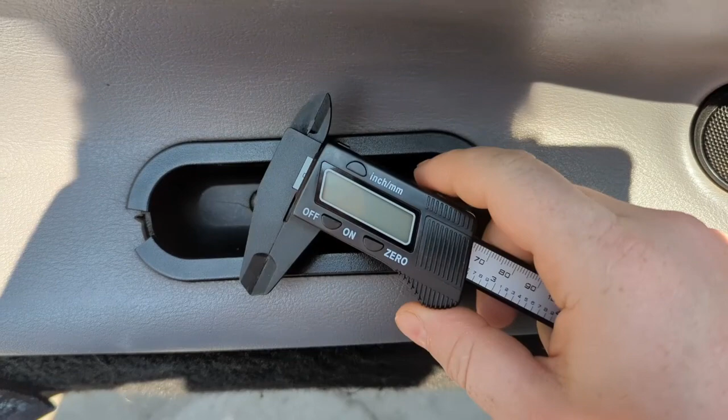These crack and break often. They're like 80 bucks if you can find them. But we're going to 3D print one, and I'm going to show you how to prototype that. And all you're going to need to prototype a part, for this video at least, is a screwdriver and a set of calipers, and then some free software for prototyping. So something like Tinkercad would probably be okay.

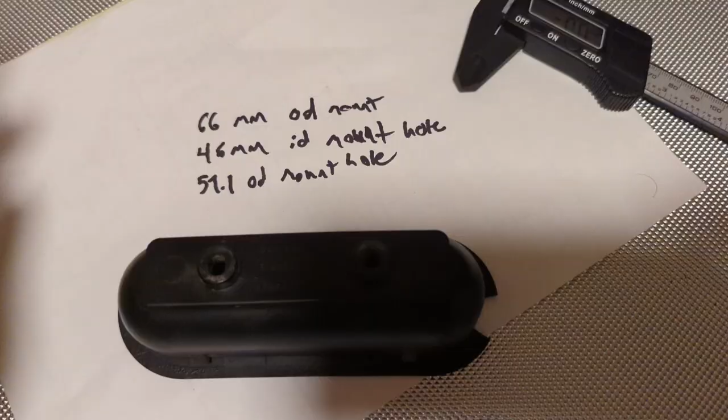All right, so we got the part out of here, and now we need to start taking some measurements. So I'm going to take this back to my office, and I'm going to show you how to use a set of digital calipers and how to reproduce something that you can print with ease. Okay, so I'm going to go ahead and explain to you how to use a set of digital calipers. And now that we have this part out in front of us, we can see what we need to measure.

Now, these are the mount holes that were on the bottom. This actually could be completely flat here. I'm not sure why there was a space, why they used it exactly like this, because when I took this off the car, there was nothing underneath of here that fit this profile. These were just kind of molded that way, and I don't know why. Could have been an afterthought, who knows.

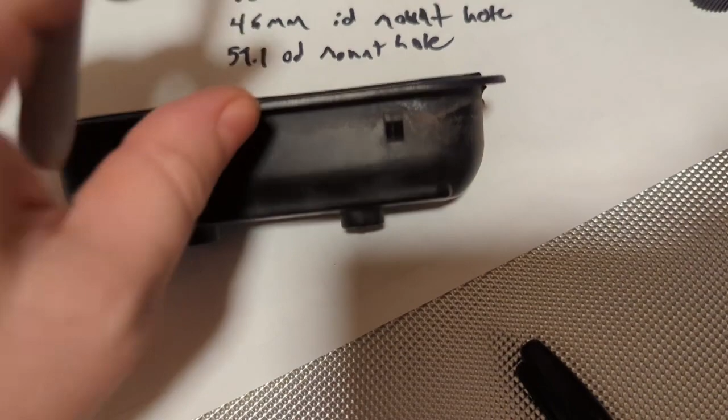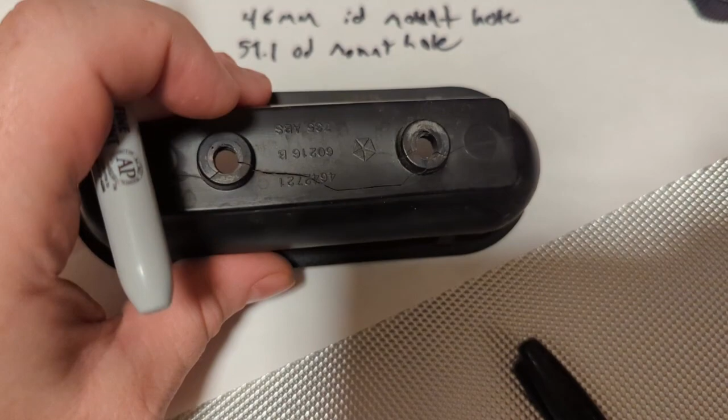Point is, when you're prototyping a part, look out for things like that, things that you could improve on the design. Because if you look in here, you can see that this is cracked underneath from all this pressure on the screws. Where did the cracking start? Where those screws mounted. So these right here, these are pressure points. You know, if you could make this whole bottom thicker, because this can all be flat where it mounts, well, you think that's going to crack? Probably not. At least not nearly as easy. So these are things to look out for when you're prototyping.

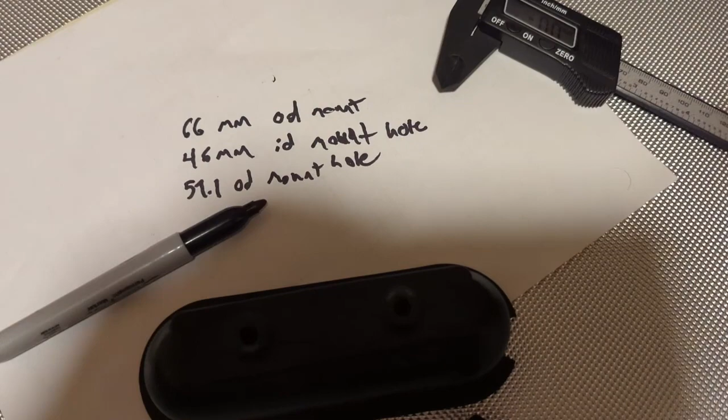But let's go over how to use a set of digital calipers. I measure everything in the metric system. I don't do dishwashers per mile. I'm sorry if that disappoints you. So make sure that when you're using your calipers, I recommend not being on inch, being on millimeter.

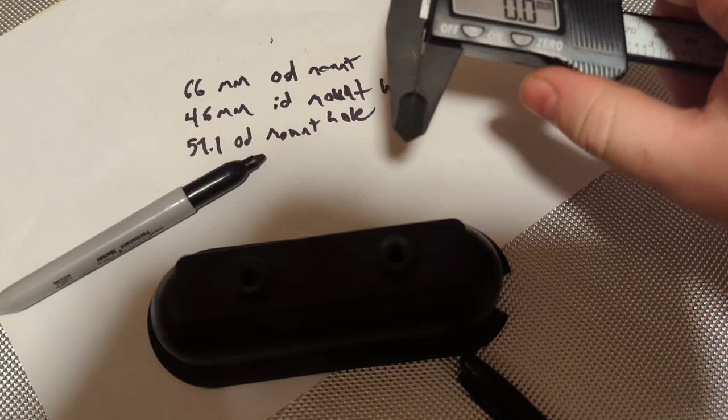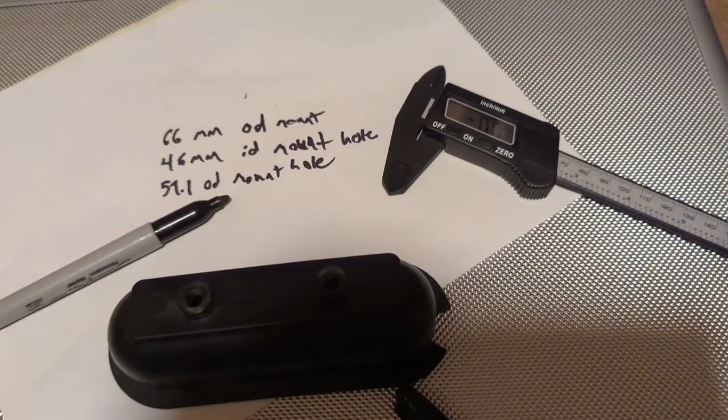If you get serious into prototyping and 3D design, I think you'll find that if you adopt the metric system, you're going to have a hell of a better time. Not to mention collaborating with other people, especially overseas. They're not going to measure in dishwashers per mile. They're going to use the metric system. And I think you'll just overall find it easier.

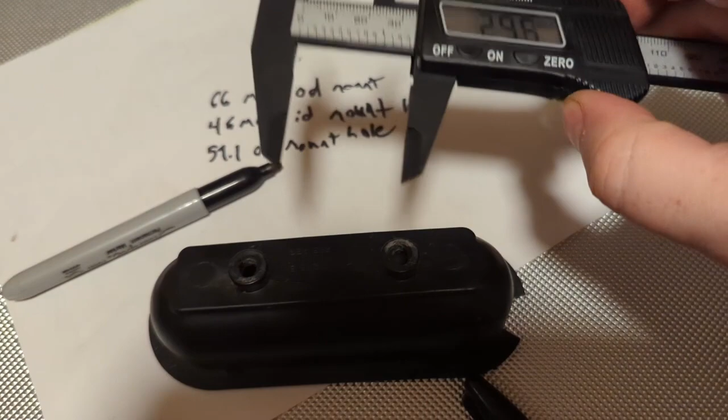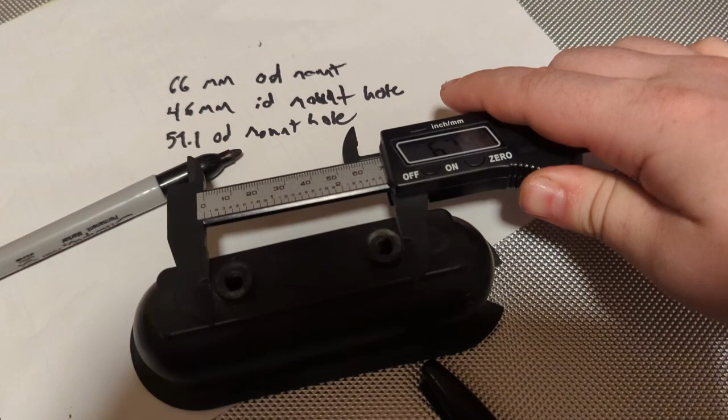So when measuring these points, we're going to start off, and I've already pre-mic'd these up here, but we're going to verify our findings here. And we're going to look and measure the outside of this mounting spot, right? So we're going to use this edge, because this is the edge that's going to pinch this, right? We want to make sure this is as accurate as we can get it. All right, and I gave it a little bit of leniency. So we've got 65.8, but realistically, if I move it up just a little bit, we've got 66. That's a negligible difference. So we're going to just put that down and keep that there.

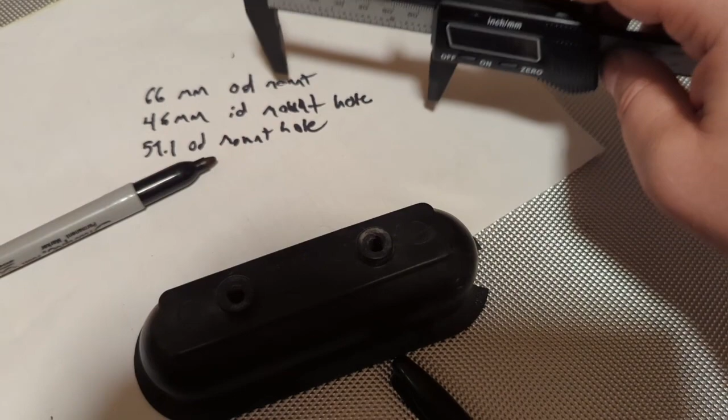And then I've got 46 millimeters inner diameter for the mount hole. Now, this is going to be this to this over here. Now, I can't measure that with this piece up here, because this is for things on the outside. This is for things on the inside. They're both just as accurate. They're just measuring things for a different purpose, right? So that's something to keep in mind. Some people see these on their calipers and they have no idea what these are for. So just to let you know, that's what they're used for.

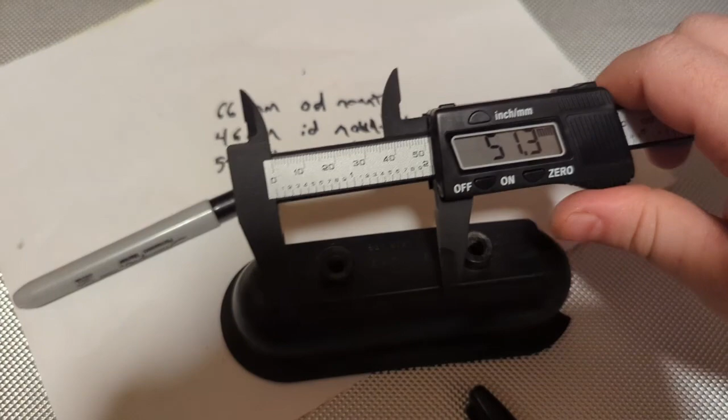So now we're going to measure that. So we're going to go inside to inside here. All right, we got 46.1. I rounded that down to 46 because that's not going to hurt anything, especially since these are screw holes, to be off just a little bit. So I'm kind of rounding these. 51.1 could realistically be 51.

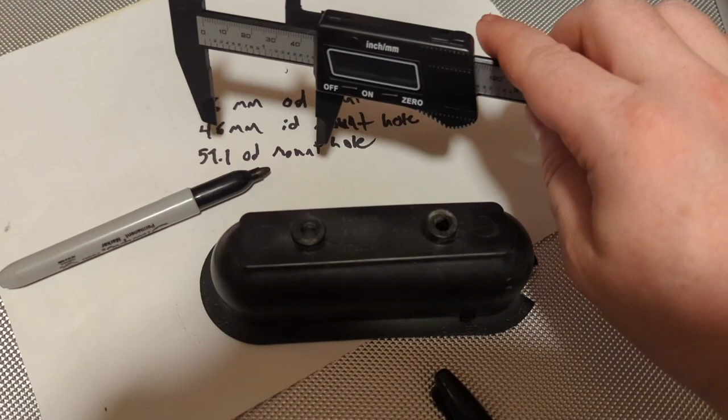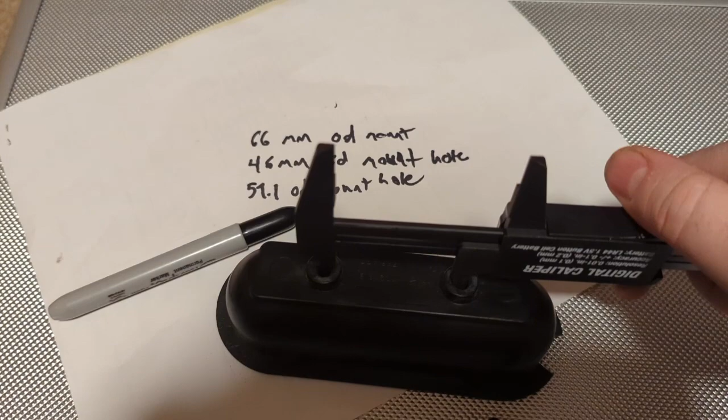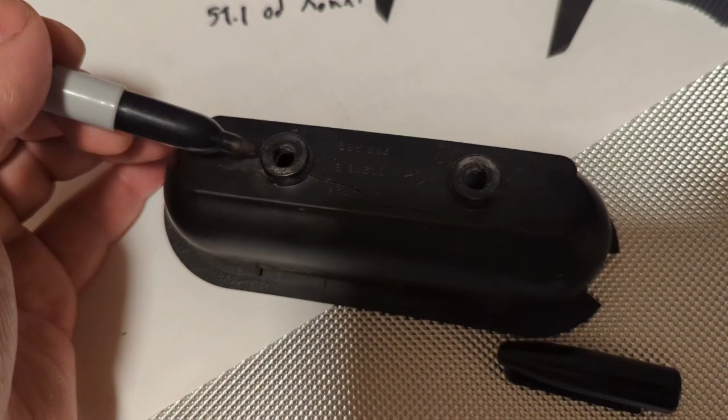When we go to 3D print stuff and design our 3D design, how far this is from here to here, from here to here, and from here to here. That'll let us figure out how big the holes need to be and how far apart they need to be. And then if we get stuck and we find out something didn't fit right, we can go back and double check our measurements. So that's the whole point of miking something like that out.

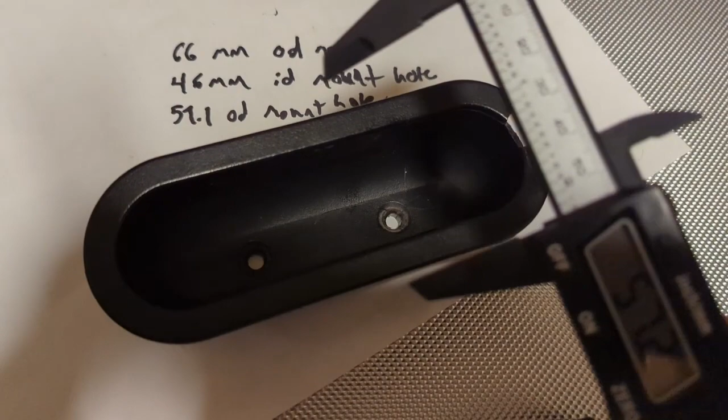Now I'm going to mic the rest of this object out. Things to keep in mind as you're doing this, things that you want to look at, are going to be things like this guy right here. You know, how wide is this, right? So if we come down here and we're measuring the top of this, oops, sorry. Kind of hard to do with it sitting up there on those little thin guys. All right, we've got roughly 53.5 in width, right?

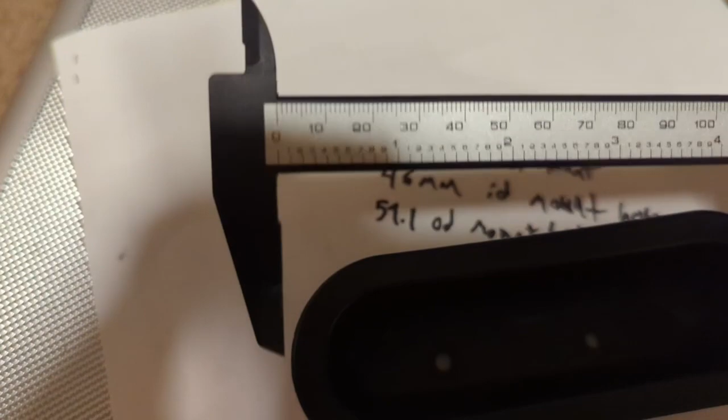And then you need to do the length of the object. And these are just barely going to reach, right? So I'm not going to be able to do that with one hand holding my camera here, but I'll mic that out. But just to give you an idea, you want to make sure that you can get as much of this as possible. Other things that you want to get, thickness of the plastic.

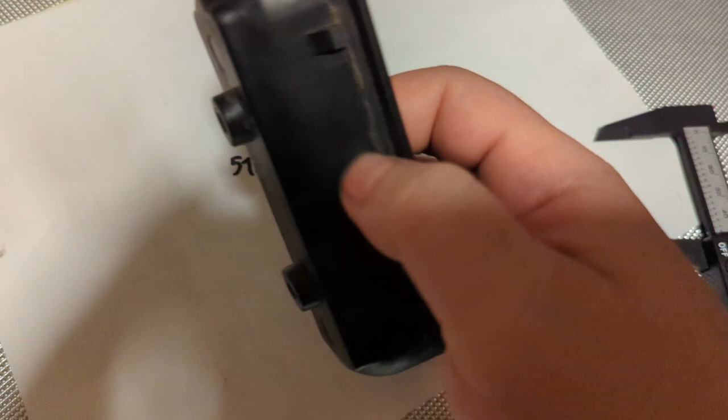Now an easier way and a better way to figure out the thickness is we measure what this bottom thickness is down here, right? So we'd measure this point to this point between my fingers, and then we measure the inner measurement from here to here. From there, we'll be able to construct an object like a square or a rectangle in our 3D program, taking the difference of this out, and what we're left with is the thickness of that wall. That is another way to do that.

A lot of the way that I design things in 3D is actually using subtraction and a lot of addition. Basic math skills. In Rhino, it's called Boolean subtraction. You create two objects. For instance, I have a whole object here. Let's say this was just a square. And then I've got this inner part right here that I've made as a rectangle. And I want to have that rectangle within that square so that it becomes the shape of this handle. I do a little Boolean subtraction. It cuts that out of there, and what I'm left with is the whole part.

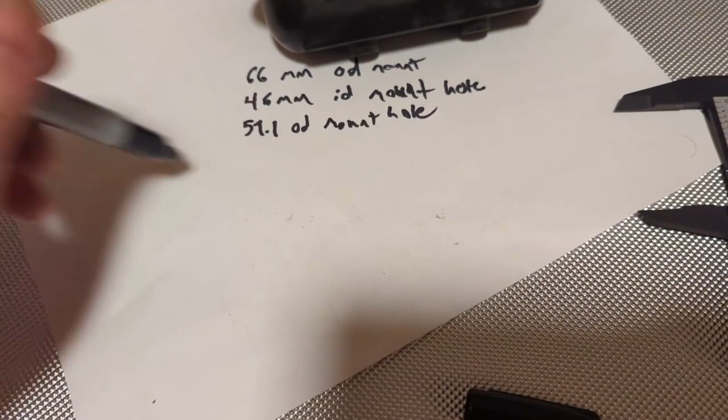So those are a couple of things that I tend to do. Sometimes that's faster and quicker than trying to do very specific, fine measurements. Anyway, let's get this marked out, and then we're going to put on paper all the needed things that we're going to put into our 3D model, and then I'm going to go show you how to do some 3D modeling.

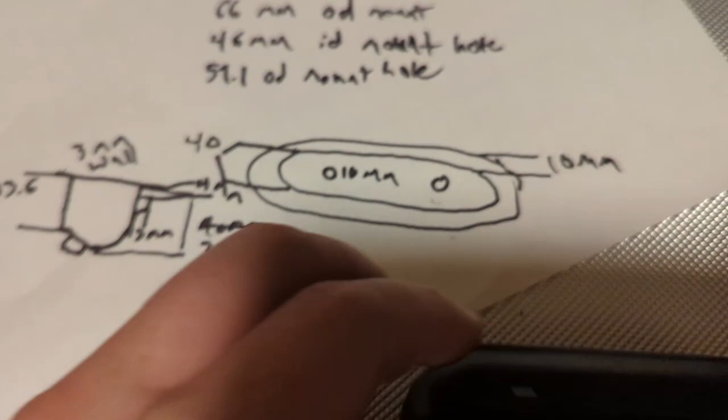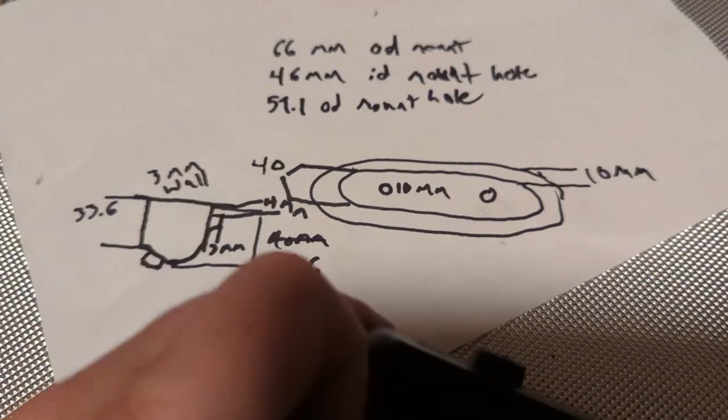All right, so I've mic'd this out for you. You can kind of get an idea of what we did. So I did a really quick one, just from the top down, right? Here's the screw holes. Here's the lip, this guy right here. And I always draw lines equal to the part that I'm trying to measure, so that if I need to go back, like, what did this 10 millimeter mean? It was measuring these two pieces right here as I pinched this. Okay, what's this? Oh, I measured the width between this right here.

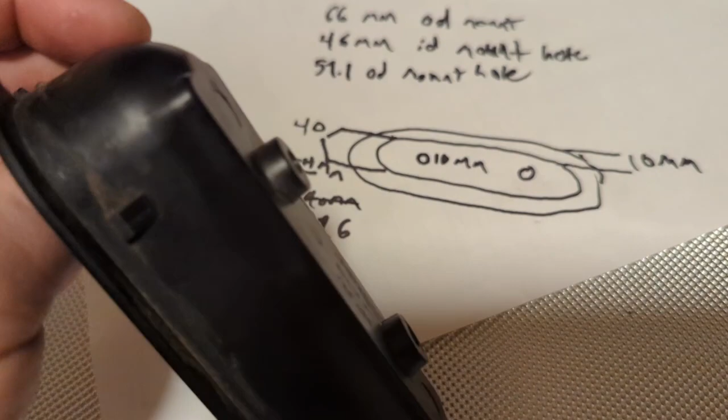So from the top here we got a 10 millimeter edge. That's what we're working with. I measured the wall thickness, and I did that by measuring the thickness right here, and also this wall right here to make sure it's consistent. We got 3 millimeters, so I wrote that down.

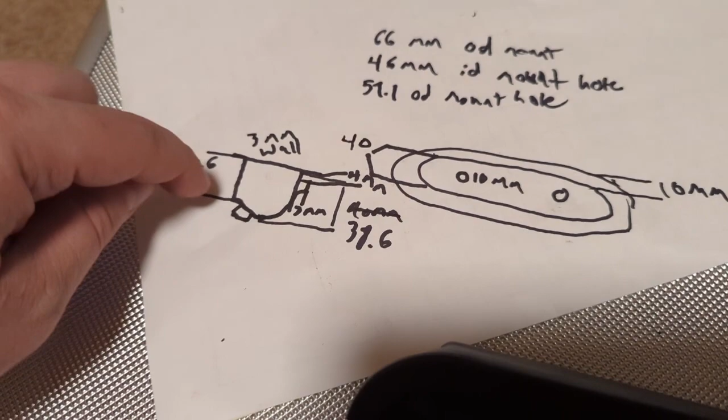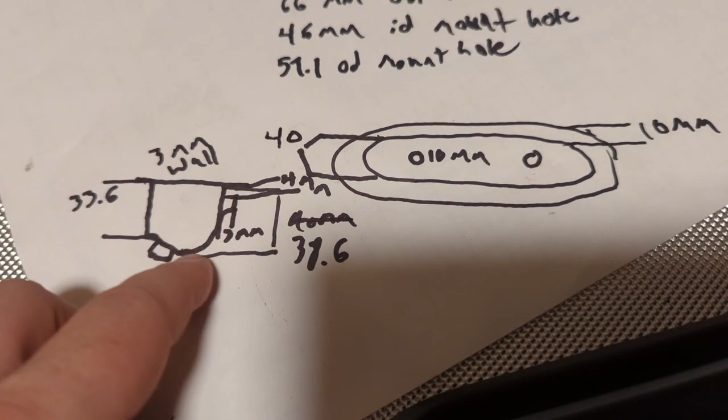For the measurements down here, this has a slant. So if you look at the profile of this, we can see this is not perfectly up and down, right? This has got this little slant right here. Now, we could do a whole bunch of complicated math on trying to get the angle, or we could do this the easy way, which is figuring out how far out this goes, and then how far down the first edge is, and then how far down the second edge is. And then from that, we'll be able to just design that in our 3D program.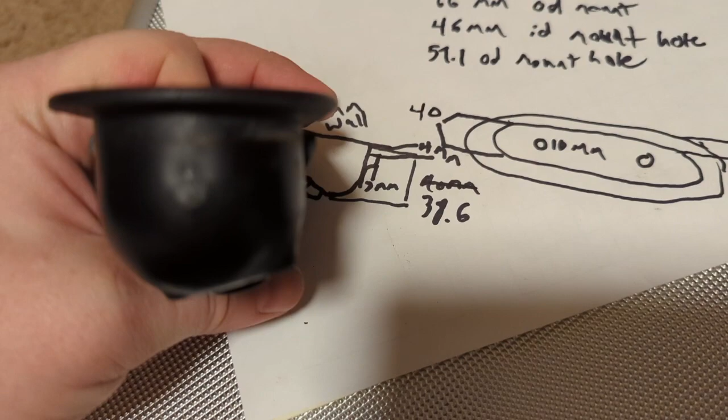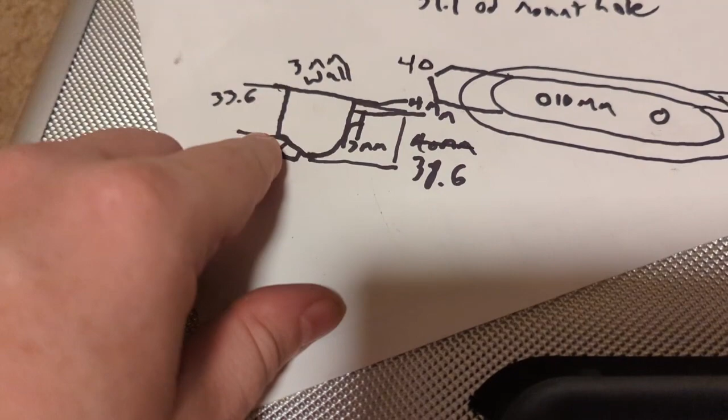So we need to get what the length is from here to here, of course, but you can see that I've already mic'd out what the distance is for those. So when we go to put that in, we'll have what that slant is. We'll have that calculation done.

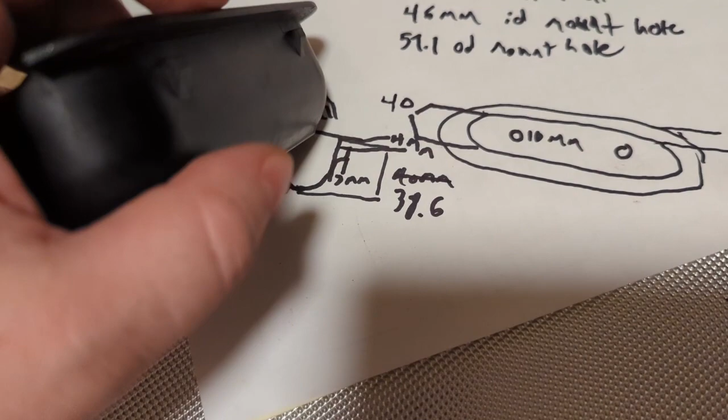Now we got these little hooks. I didn't draw it great, but you can see that there are some hooks to keep these in here. There's little clips on the side. And we've got 4 millimeters from the top of the lip down here. And then we have got 3 millimeters is how far they protrude.

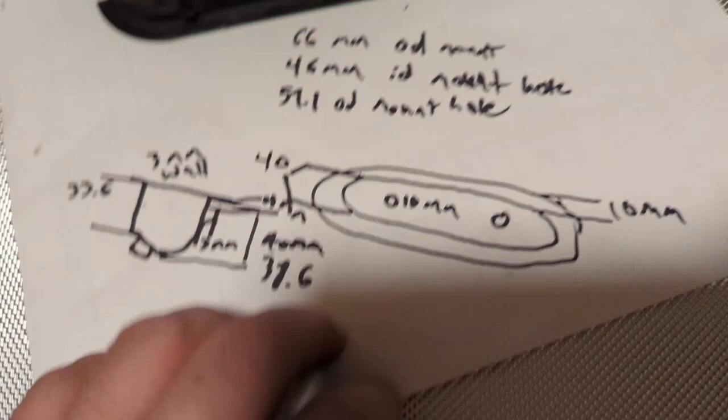As long as you have mic'd out your object, at least in a primitive enough fashion like this, you should be able to go in and do some 3D design fairly easily. So let's go do that.

Hey everybody, so the next thing that we're going to do is I'm just going to show you some basic sketching skills in Rhino. This is the software that I use. You can use Tinkercad or Google SketchUp, or there's a bunch of different free alternatives. Realistically though, this is the one that I use because I bought a commercial license for it some time ago.

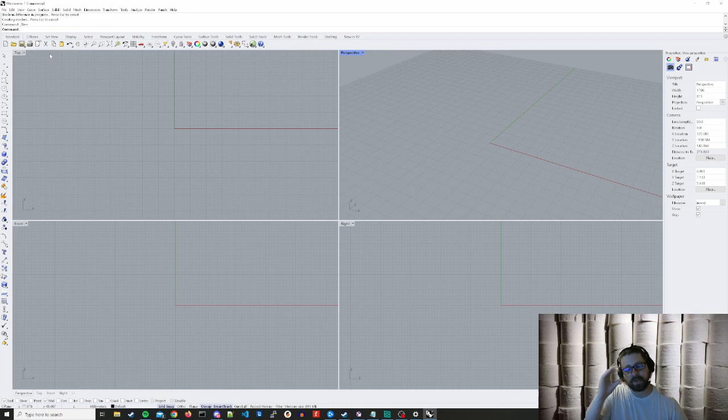And I've been using it since high school in the year 2003. This is now Rhino 7. I used Rhino 1 when it came out, and I have continued to use it.

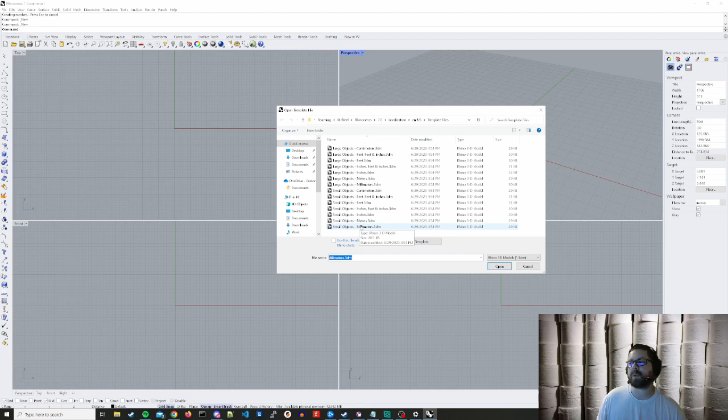I love this tool. You can do what you wish, but we're going to start by going to new, and we are going to go to small objects, millimeters. The difference here is you have large objects, but the grid scaling is different. Since we are going to be doing more fine work, we really want to use millimeters on small objects.

And so having mic'd out your object, I'm just going to show you some of the basics. We're not going to create a whole object today because it can take hours and hours to do that, and I really don't want to waste your time with my first tutorial. I really want to make this something that's like, hey, here's how you use a set of digital calipers, here's how you mic something out, here's the things to look for, here's how to do some basic shapes, and the quicker ways I get to the actual object I'm trying to make.

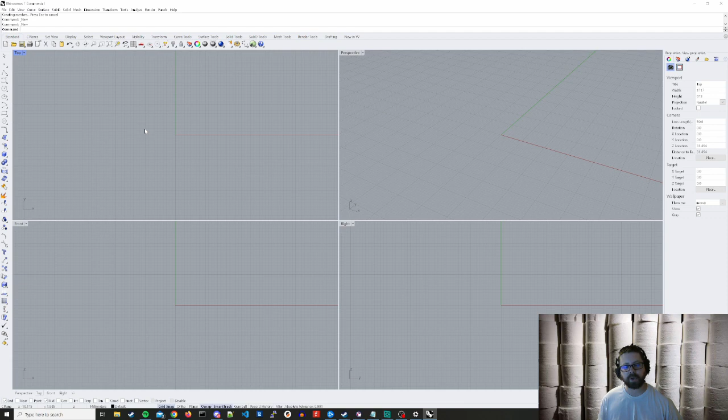And so the first part that we're going to make today is going to be the lip. And by the lip, I mean, if we look at this object, we've got the outer ring right here that I measured. The outer lip is 10 millimeters. The inside was 40 millimeters across. And so we're just going to make the outline of that and then make it 3 millimeters thick so you can see how easy it is to do that.

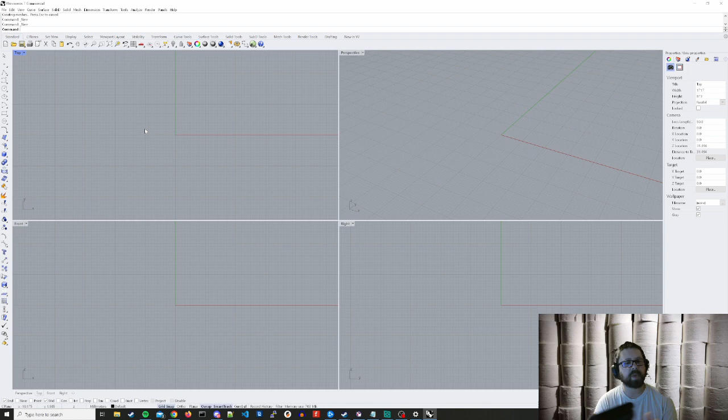Because looking at something like this, you might go, I don't even know where to start. Okay, I've got this 40 millimeter measurement and this 10 millimeter and this thickness, but now what? Now what do I do? We're just going to go through that. So let's go through the motions.

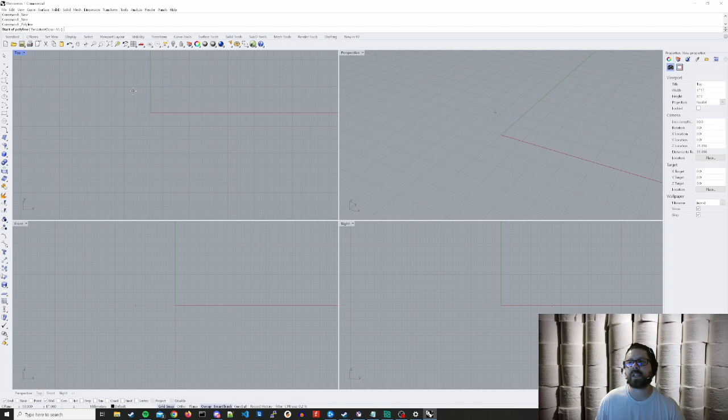First things first. We are going to make some lines, and that is just to sketch out a rough idea of my dimensions. You don't have to do it this way. I'm a visual person. I like to learn visually, and so when I'm doing this stuff and putting this together, sometimes I come up with quicker ways to do it.

So we're going to click line up here, polyline. I always start in the center grid point, and we know that our measurement across is 40 millimeters. So we're going to type 40 and enter. We're going to click it so it's straight up and down, and go ahead and hit enter. Now we got our 40 millimeter line.

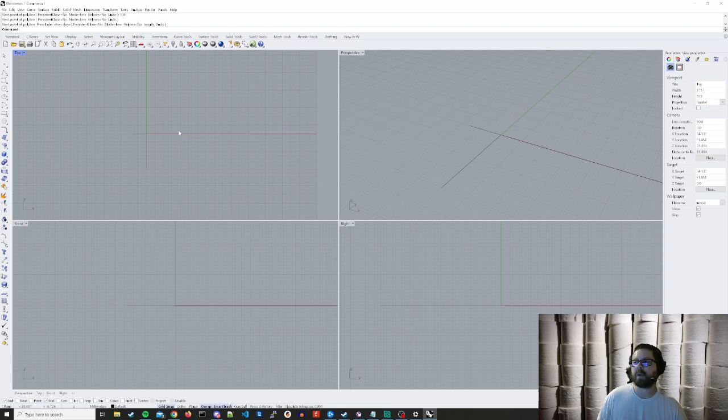The next measurement was across, and we know that that was 134 millimeters. So we're going to go end to end over here and type 134, hit enter. Then we're going to click so it's nice and straight and hit enter again. And now we've got this cross section, and that is our 134 by 40.

But it's not a square object, right? It's kind of an oval. What do we do about that? Well, okay, I've got an idea. We're going to draw some circles. So we're going to go up here and go to circle. We're going to start at midpoint, come up here to the end point.

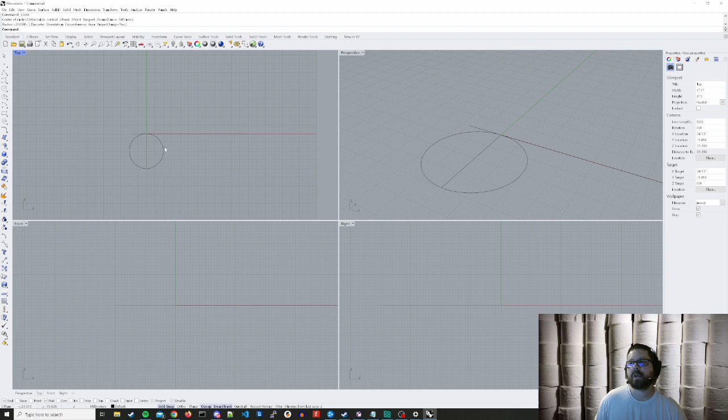And what that does is that now we know that this circle is going to make that oval edge for us, 40 millimeter. But the caveat here is if we put this all the way out on the edge, now this object is a little bit longer than 134, right? That's a problem. How do we get around that?

I'm going to drag this line over, and we're going to line these up so that this white dot here, which is the square edge of this circle, lines up with the end of my line. And now I'm going to copy it, and I'm going to paste it, and we're going to do that to the other side. And now we're going to check this, make sure it lines up. We look there, it's lined up. And now what? Well, we're going to copy this line. We're going to go down.

And now we're going to take the guy that we drew in the first place, this 40 millimeter line, make sure it's in the center of the first circle. Line that guy up, it is. We're going to type mirror, makes things easier. Go to a midpoint. Select a nice flat plane. And there we go. Right dead smack in the middle.

Okay, but now what? Now it looks like some kind of a funny car on wheels, or I'm trying to draw wheels on a car. We need to make this the oval shape for what I'm looking for. There's a very nice function in Rhino called trim. We're going to hit trim. We're going to select the cutting objects, and they are going to just be these lines right here. Nothing more, nothing less. We're going to hit enter, and now it says select objects to trim.

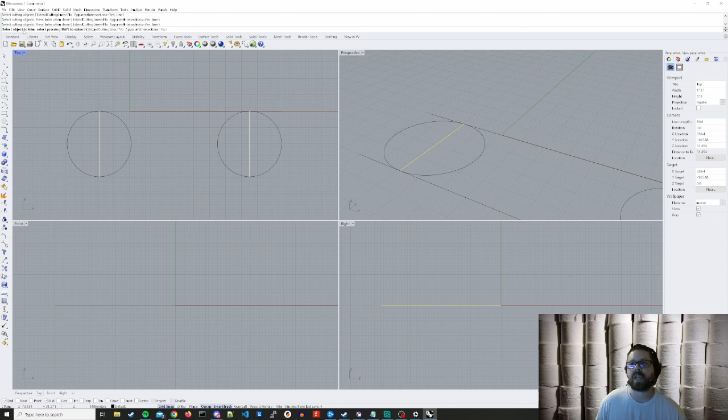Now we're just going to start trimming them. We don't want that. We don't want that. We don't want these inner pieces of the circle. We don't want those, and we don't want those. And just like that, we delete these lines, and now we have the outline of this shape right here in the exact dimensions that we need.

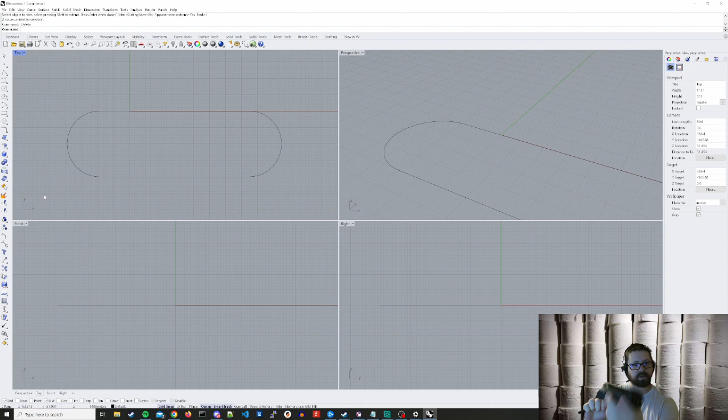You can verify this by taking your calipers, and you would go ahead and measure all the way along, remember, outside edge here on these, and you would measure this and make sure of the dimensions that I'm getting on my calipers. I'm going to draw a line from midpoint to midpoint. And what you can see at the bottom of the screen here is it will tell you what that line is when you click on it.

So we go here and we can see when we're drawing it, this is 95 millimeters. Oh no, I'm sorry. That was from the CPlane. 134 millimeters. So that's exactly what we would expect, right? That is what we initially got. So 134 millimeters. Sorry, I was reading the wrong thing. So that's how you're going to verify your stuff.

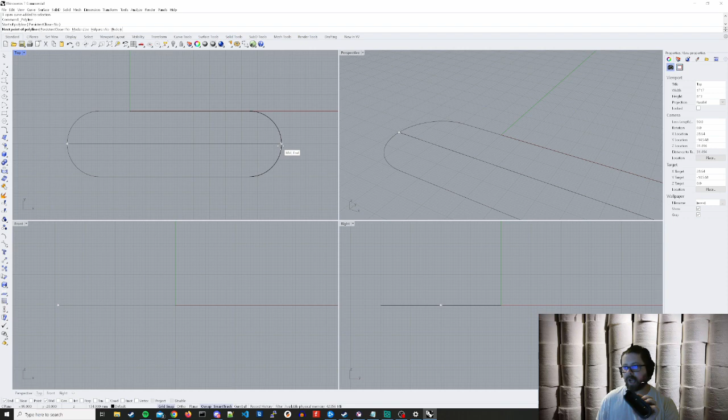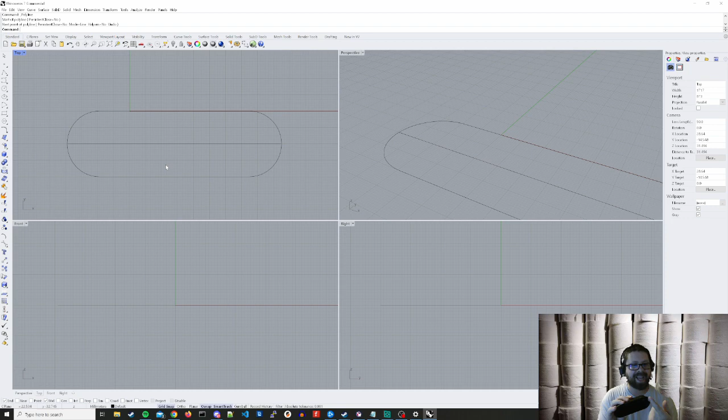So when you're miking things out, you want to verify as you're creating your object in 3D, that you're going back, measuring it in 3D, and then miking it out with your calipers and just saying, yeah, that's pretty close, or that's right on the money. That's perfect. Now, this has a 10 millimeter ring, so we would need to do the same thing for the ring. Now, this is an interesting object because these don't protrude past this and have a larger diameter. This is 10 millimeters all the way around.

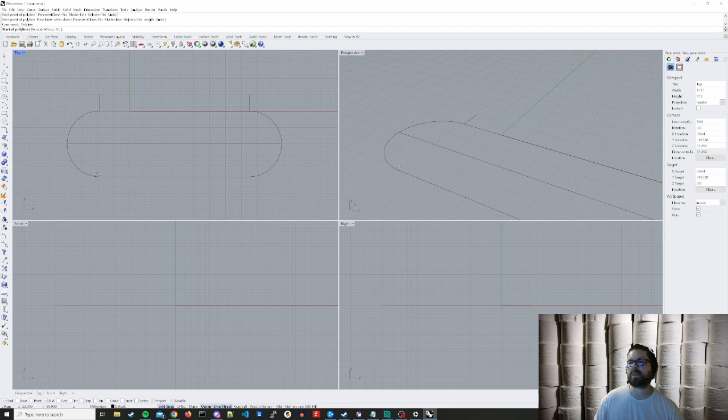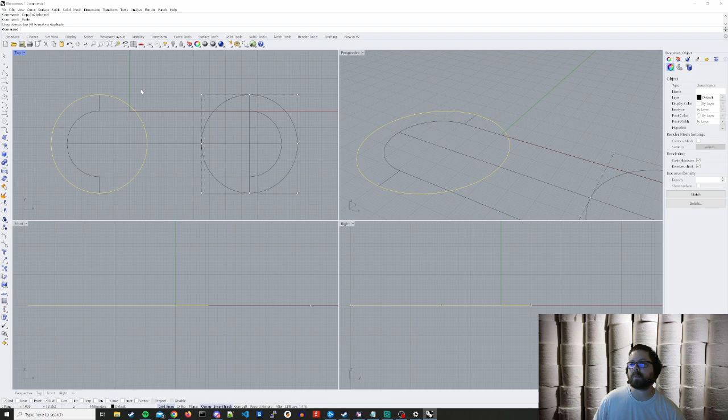So to do this, all we have to do is go 10 millimeters up from end. So we go 10, like this. And we're going to go ahead and do that down here, 10. And then I'm going to make one line from top to bottom here. And we're going to do the same thing with the circle. We're going to go midpoint all the way up. And we're going to copy and paste that guy so that the midpoint's over here. We're going to draw a line, end to end.

And then we're going to go back to trim. We're going to select these guys as our cutting points. We could probably do this one line here. And we're going to get rid of all the stuff we don't want in between. Just like that. Now we have got all of the lines that we need. And if we get rid of these extra lines that we just made, we can see that now we've actually got that lip. That lip needs to be 3 millimeters.

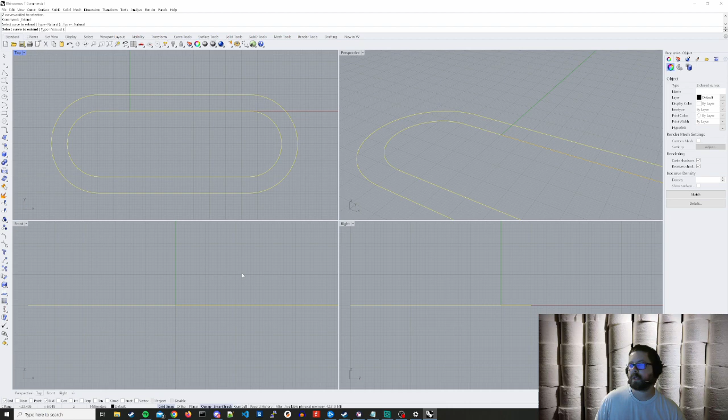So what we're going to do is we are going to drag over all of these, and we're going to click join. And you're going to notice at the top it's going to say this many curves into closed curves. That's good. Now click off, click on, make sure that they're solid. They are. It's perfect. We're going to select both of them. We're going to go to surface and extrude curve. I'm sorry, extrude curve. We want to extrude. Surface, extrude. I'm sorry, straight.

It's been a long day.

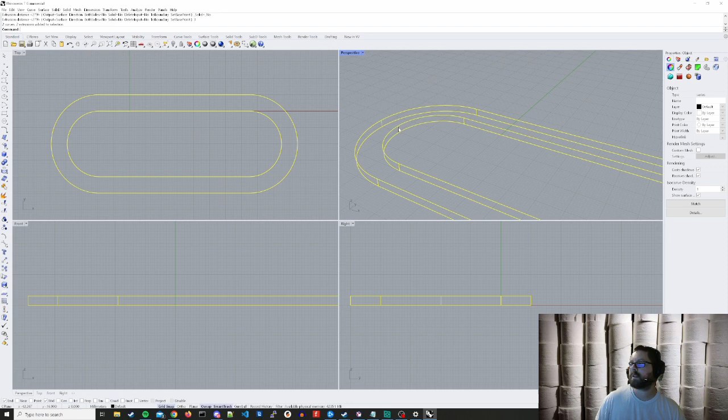All right, so we know that the lip is 3 millimeters, so we're just going to type 3. Right, so 3, that's 3 millimeters. Now we're going to drag both of these, and we're going to look at that and make sure that it's shaded properly. That looks correct to me. That's what we should be seeing. Let's see if we can get away with a loft.

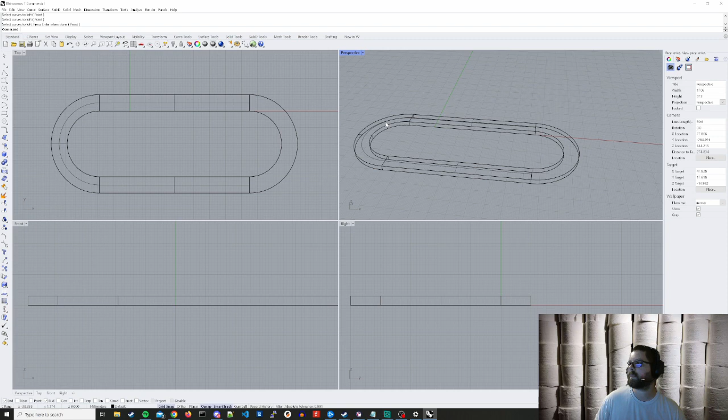I think we can. Yeah, it looks like we're going to be able to get away with a loft. Yep. And so lofting is just basically taking a curved edge to another curved edge and creating a surface. You're kind of patching an object together. Are there easier ways to do this? Yes. Again, I'm a visual learner. This is just kind of how I do stuff.

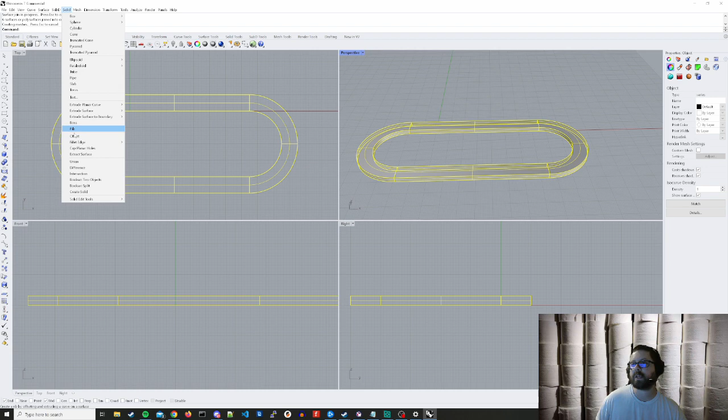Now we can select all of these and we can join this. And if we go to solid and we cap planar holes, we're going to add everything on the bottom, and now it is a solid surface. So now if we go back and look at our object that we're working on, and we turn this guy sideways, we can see that we got a 3 millimeter lip. And in the object, we've got a 3 millimeter lip. The protrusion is roughly 10 millimeters from the bottom to the top. We can double check that in here. And this part of the object is ready to print.

I'm not going to go through and do all the complexities on this today because we'd be here for hours. There's just too many things to learn. I really wanted to get you guys started with how digital calipers work. Again, this is a $10 set of calipers that I got at Walmart. Are they the best? No. Are they going to get you started? Absolutely. Are there 3D design software suites out there that are free? Yes. Will they get you started in creating this kind of stuff? Absolutely.

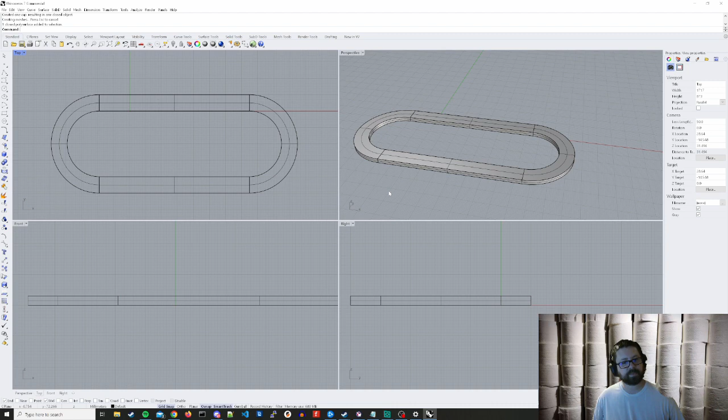So let's just say that we wanted to now print this, right? We need to export this file, and we need to make it into what's called an STL. So let's do that. In 3D software, I always save my file. So we're going to save this. We're going to go into the template files. It's fine, but we can just make a new one here just for the purposes of this demo. And we're just going to call this demo. And let's call it handle ring, because this is the outer ring of it, right?

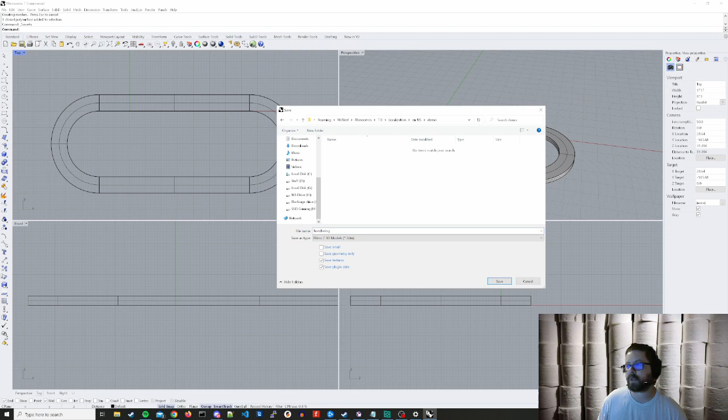And we're going to save that as a Rhino file because we want to be able to make changes to it. Once you make it an STL, it's kind of a pain to go back. You can, but you don't want to. So we'll save that. And now we're going to copy this guy, and we're going to go export selected. We're already in our car parts. Sure, this isn't my Yelpa, but we're going to put it in here anyway, just for the purposes of the demo. And we're going to choose STL, stereolithography. That's what we're looking for. The STL file is what's going to be sliced when we are done.

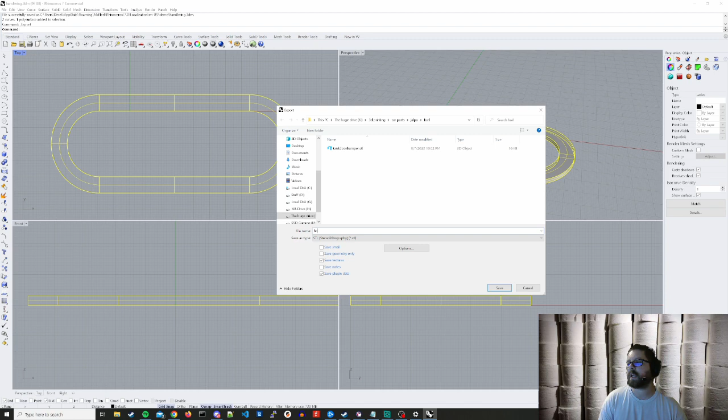So we're going to call this the handle ring. That's fine. I know where that's at, so we're going to go there. It's going to ask you what the maximum distance is. I use this at 0.01 millimeters. I always leave this default. Always do binary. All right. So now we have it exported as an STL. The next most important thing is we need to slice it. So this is how we're going to load it to a 3D printer.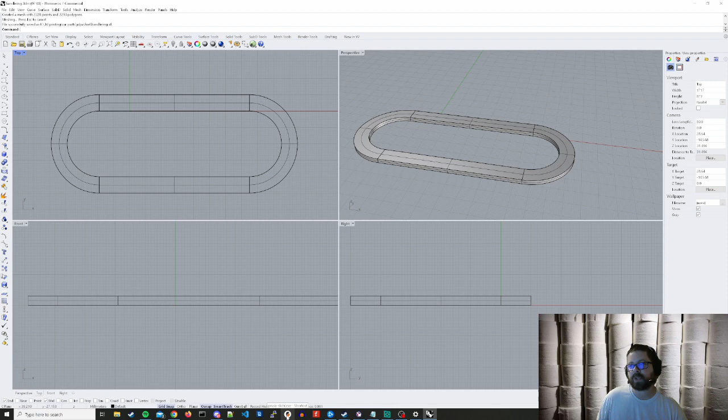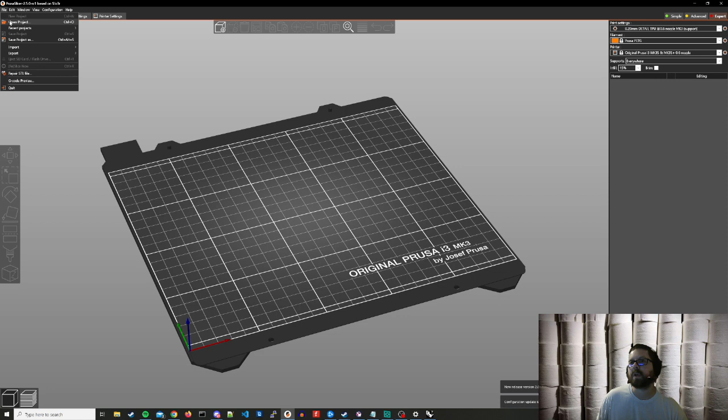Now, everybody who has a different printer is going to have a different slicer that you're going to prefer. I have a Prusa MK3S, so I use Prusa Slicer. This is the beta version because it's got the different options for slicing that I like, namely so that I can use my 0.6 nozzle a little bit easier. And now we need to load up the file. So we're going to import STL. And here you go, handle ring right there. Ta-da!

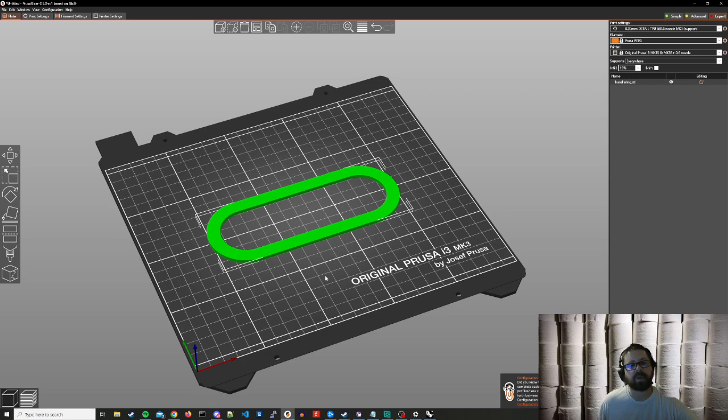Okay. And so the things that you want to consider when you are slicing an object, when you are making something that you're prototyping, is the material. Is this going to be something you're going to drive around with for a little while? If it is, probably don't make it out of PLA. PLA is not going to hold up to heat. It's not going to hold up to the elements. It's great to get something very quickly printed off the printer and onto your car or whatever you're using.

If it is going to be something that you're going to use for a while, I would recommend ASA or PETG. And the reason for those is they hold up to the elements better. They don't tend to warp as easily. PETG is tougher to print with, for sure, if you are new to 3D printing. I've oftentimes had a hard time printing PETG when I was first learning.

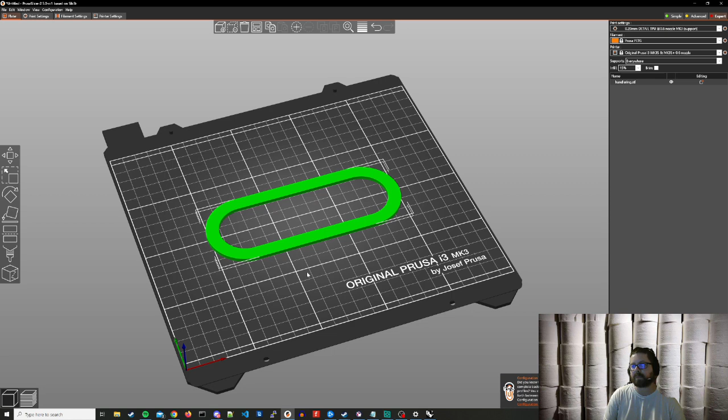My recommendation is to get an enclosure for your printer if you really want to do PETG. Otherwise, sticking with something like PLA just for temporary prototyping is probably okay. For actual production prints, PETG, ASA, or nylon are good choices.

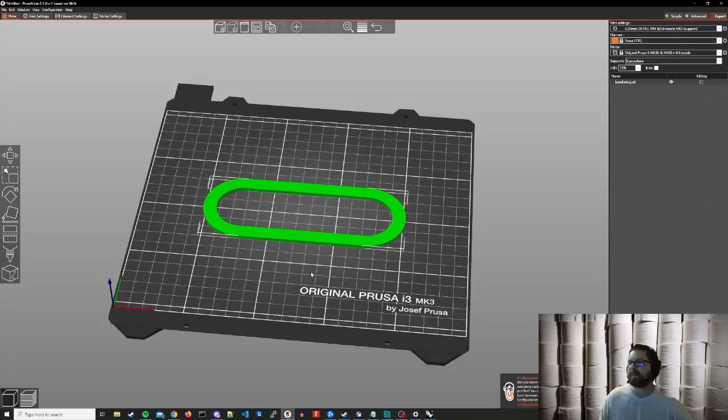Nylon holds up against gasoline and chemicals quite well, so if you're going to do something in the engine bay, it's got good chemical resistance. There are some nylons that are less caustic than others. So plastic material selection is going to be your biggest thing. If you make it out of the wrong material, it's going to suck.

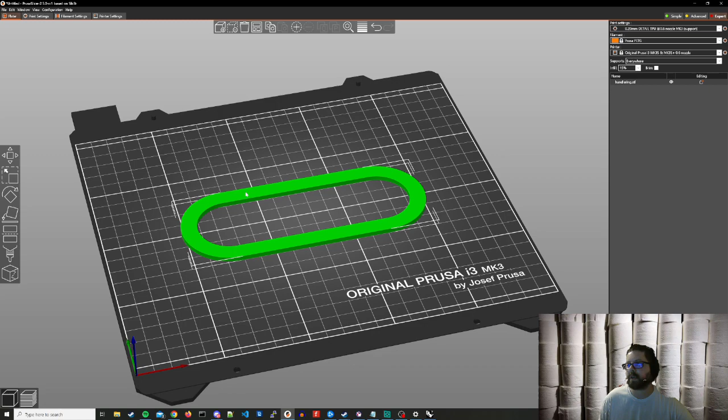So let's move to the next thing, which is how we want to print it on our printer. The direction you print something is going to directly affect its strength. If I had screw holes in the top and was bolting this down exactly like this, face down would be the right way to do it, because the layers are coming from the bottom to the top. I'll show you what I mean.

If we zoom in here, we can see layer by layer how it's going back and forth. We've got a little bit of infill material in there. Realistically, you'd probably print this without infill, but you get the idea.

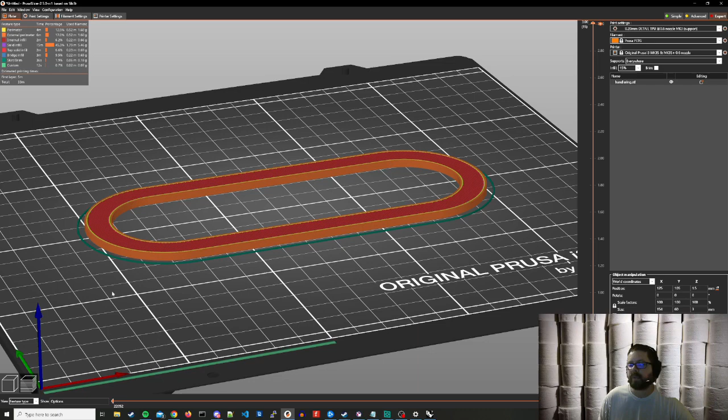Now, if I wanted to print this incorrectly, I could make it face down on this face and print up. But as you can imagine, this is not going to be very strong. The reason is when we slice this, you can see all the layers are coming through here. What happens when you apply force to something on this face?

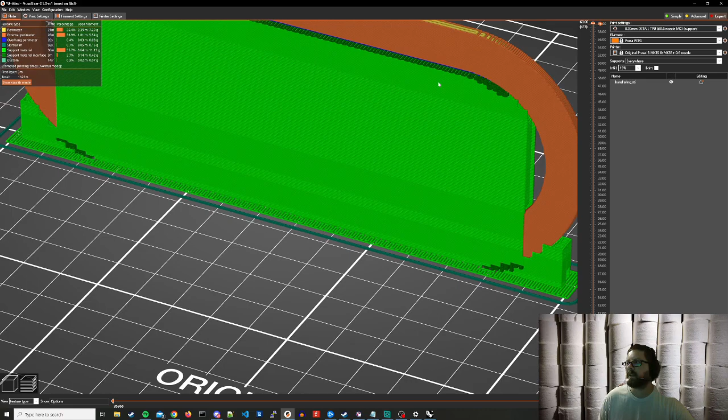Because the layers are going back and forth here, you're going to be prying it apart, right? Those layers are going to crack, you're going to split it. So that's something to keep in mind when you're printing something - the direction you print it is going to directly affect the strength of the print.

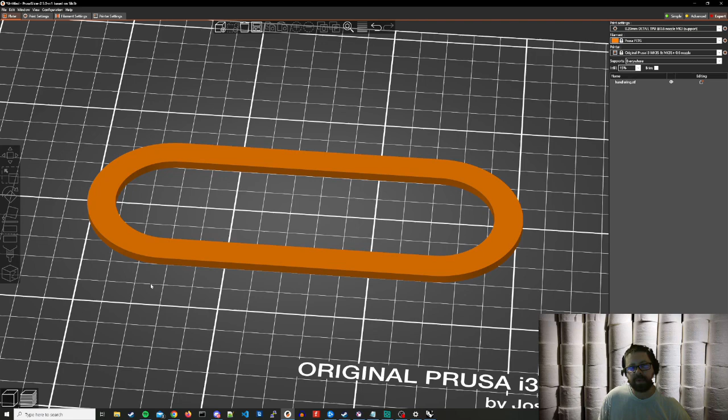So I think that's about all I want to cover for today on this tutorial. I know this is already a little bit of a long tutorial, and this is some fairly basic stuff, but I wanted to take you beginning to end on how to begin prototyping parts, how to measure things, how to put them into 3D modeling software, how to export it as an STL, and how to slice it.

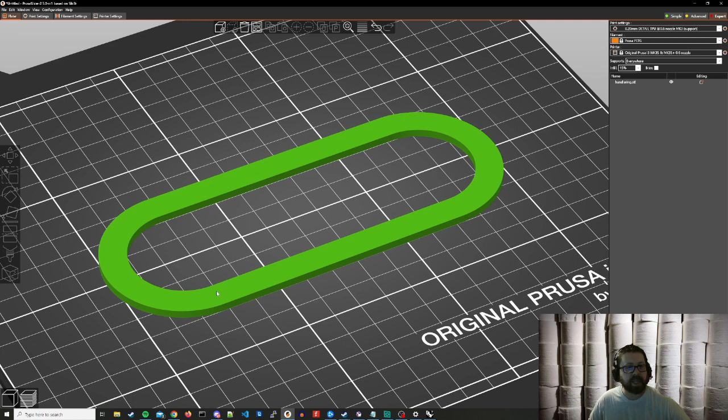Once you've sliced it, you can easily export the G-code, put that on an SD card, throw it on your printer, and Godspeed. There's always more to it than that, but I hope this will at least get you started.